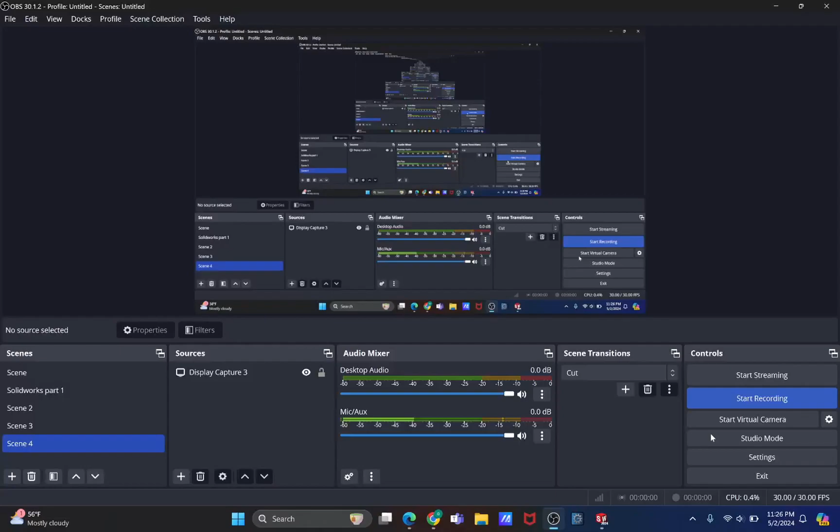Okay, so is this the time of day in which we will finally get to our final test essentially.

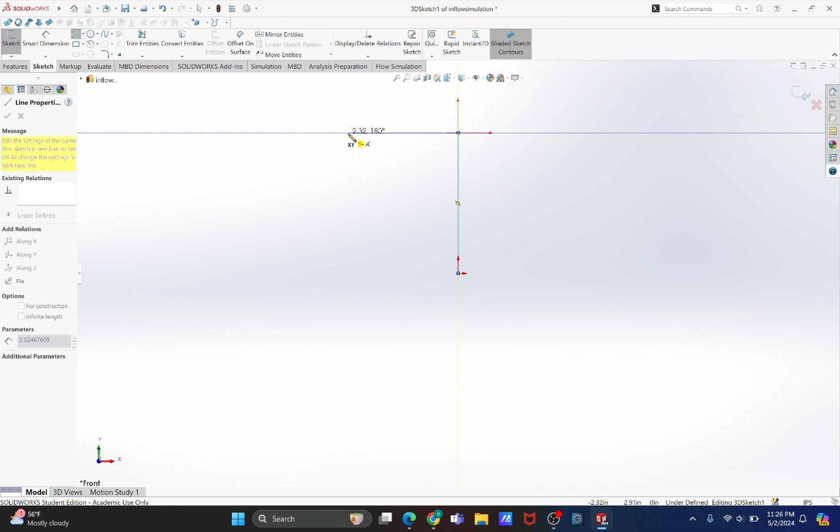So what we want to do is just create a sketch - actually, a 3D sketch. As always, I'll select the line, Control 1 on my keyboard so that I'm facing this plane. I'm gonna put this one here and then over here as well. I'm trying to make this as simple and easy as possible. Notice I'm using these red arrows to make my lines.

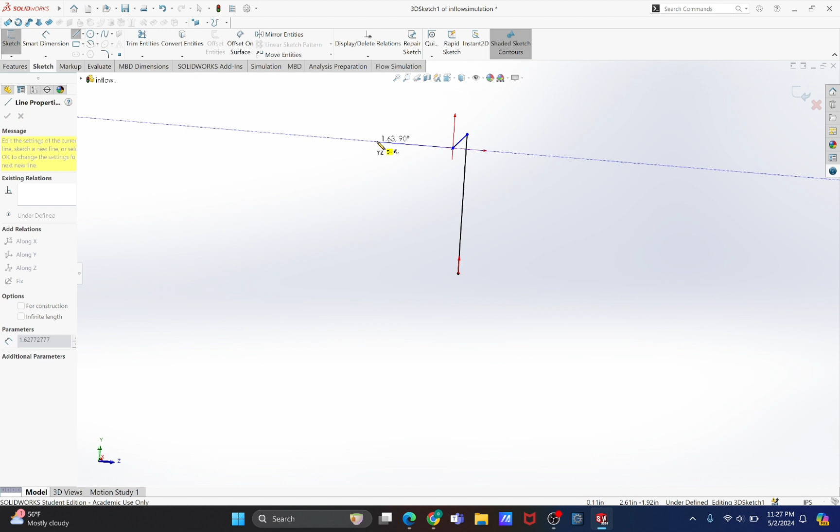I'll go back and select the line, and I want this to go in this direction. Now I want dimensions for this to be 10, and this one 7 by 7. So 7, and this by 7, and then I'm gonna select this fillet, which is going to give me 4.

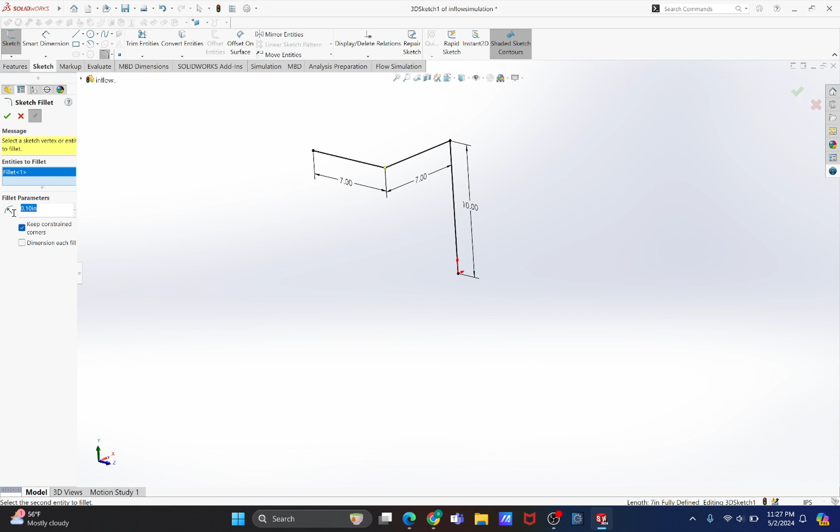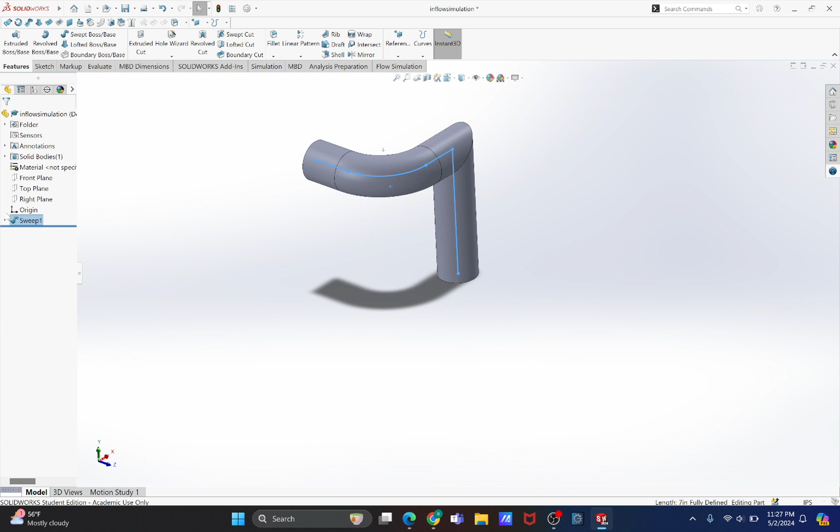After that I want to do sweep boss base, circular, and I want this to be 3. And actually I forgot something else which I will go back and fix.

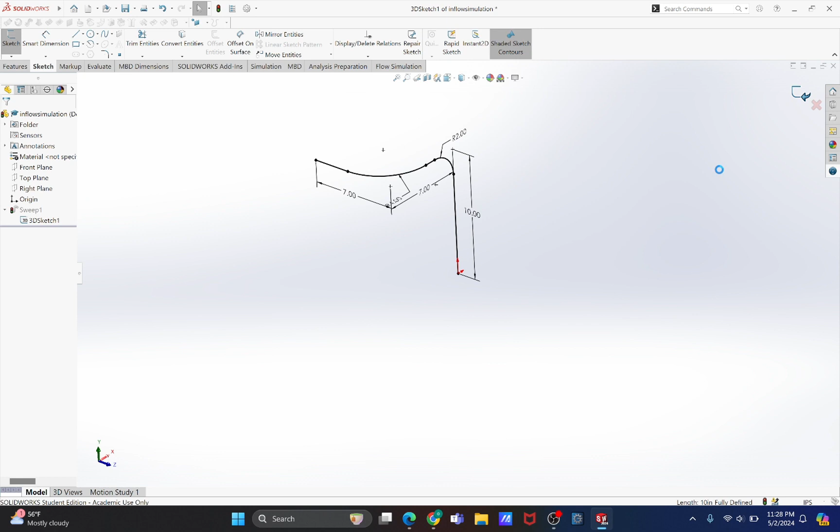I want another fillet right here, but this time it's not gonna work at 4, so I need to decrease it to 2. Okay, that should work, and it does. So then the check mark - there you go. Now I can easily do a mirror image, but I'm just gonna do a sketch.

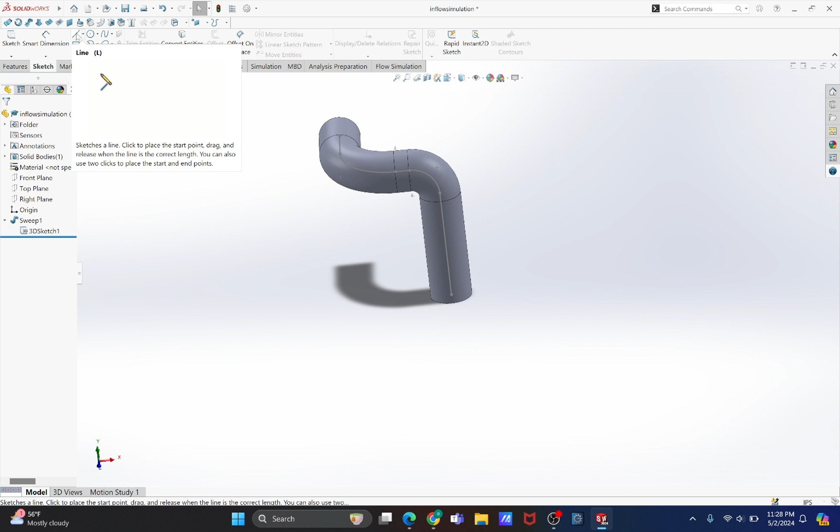So 3D sketch. Before I do that, I want to make sure that I have this as visible. I'm just gonna go right click, show. Now I can go based off of this. And so then the 3D sketch.

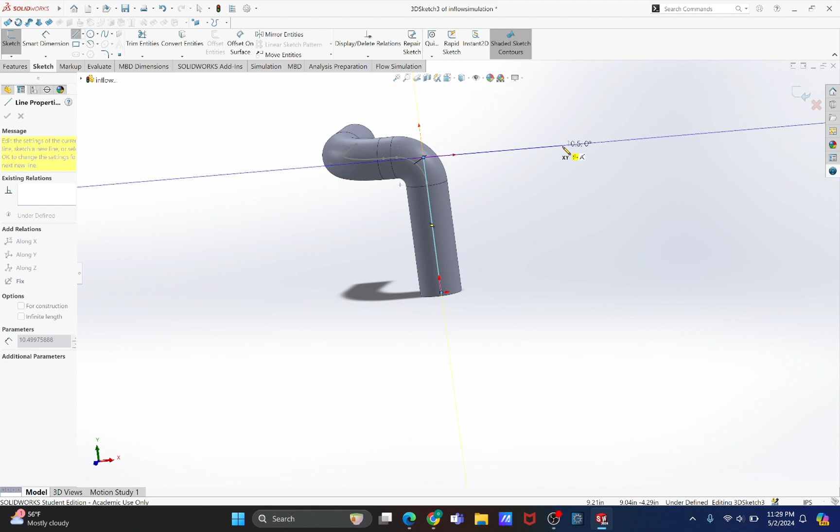We can essentially put another one. Let's see what we get. So let's just do here. We don't have to, but just practice a bit more there. Again, I'm using these red arrows to find my direction.

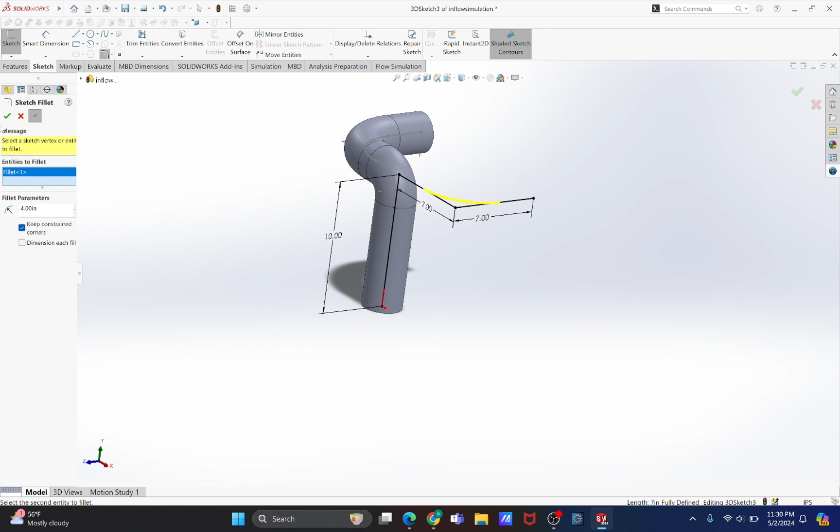Dimensions 7 by 7. That's going to be 7. There's going to be 7 as well. And this one is going to be 10, just like the other one. Now I will do this fillet right there, and that is going to be 4. And now I will make this a 2 by 2 - I mean, radius 2 right here.

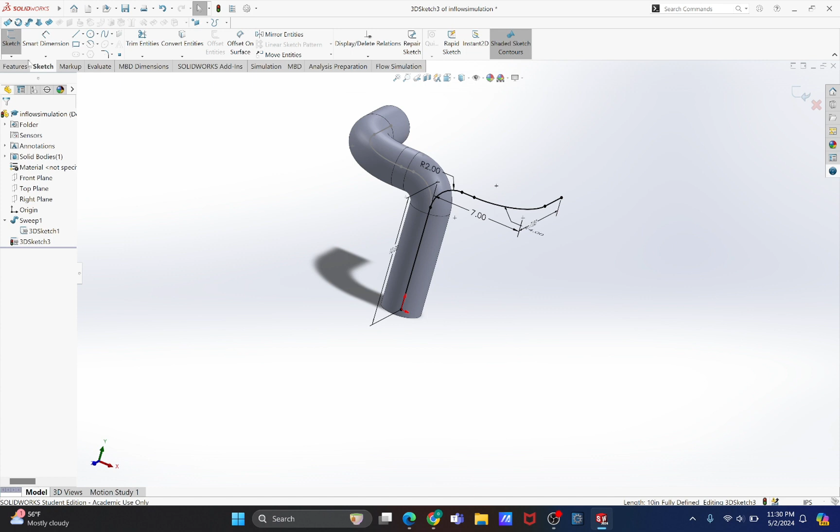Okay. And now we should do sweep boss base. And I want circular. I want this to be 3 inches. And there it is.

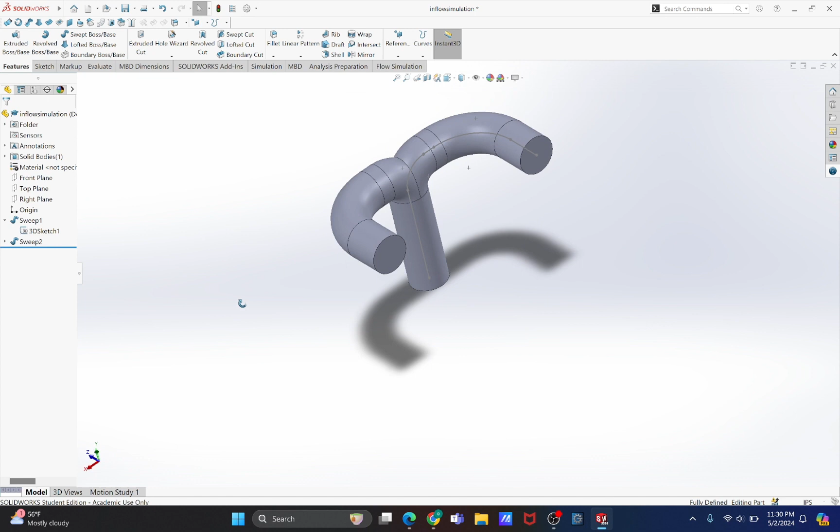Now, another thing that I'm gonna do, I'm gonna put one in the middle. And again, I'll just put a line. I don't have to actually, but I'm just gonna put it just so that I have my reference points. So sketch, 3D sketch. This might be overkill, but that's totally fine.

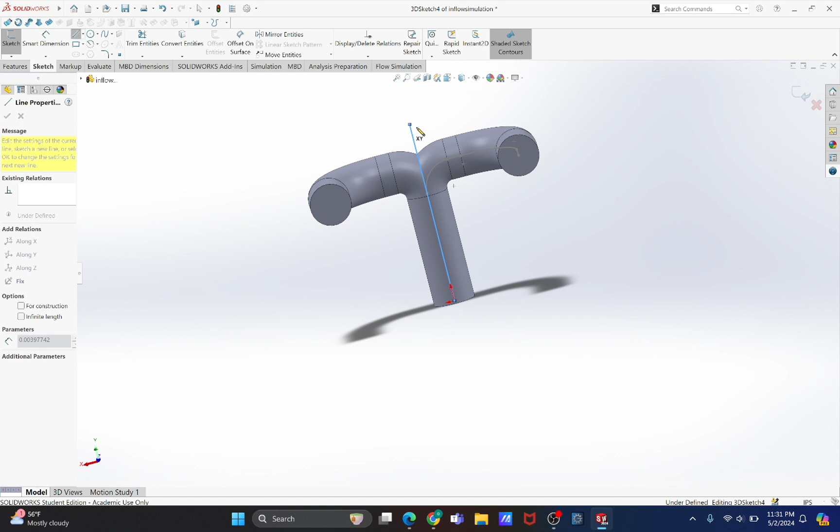Here, I'll just leave it as that because I know it's 10. The height is 10. And so then I'm gonna put it - let me undo this. And I put it as - there you go. See how this line extends?

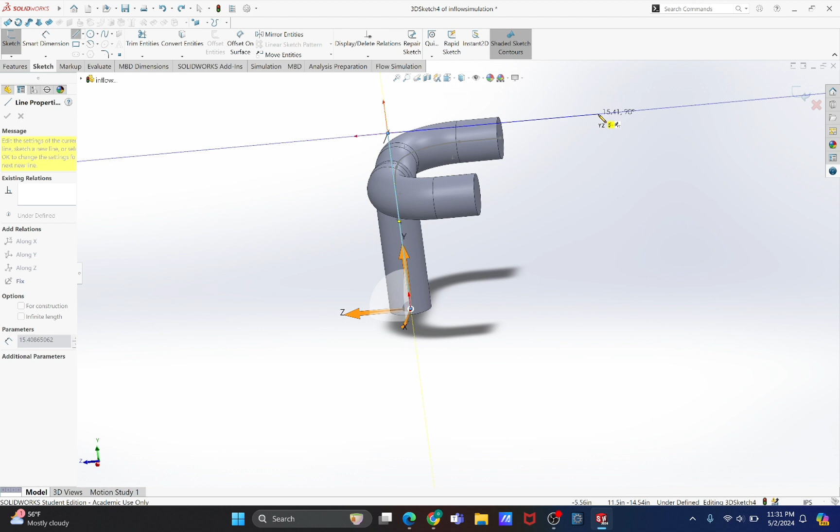That's what I want. And so then, again, this is going to be 10 - I mean 7. I want that to be 7. And I want this to be 10. Alright, and I want to do a fillet in there. So select this one, select that one, and we'll leave it at a radius of 2.

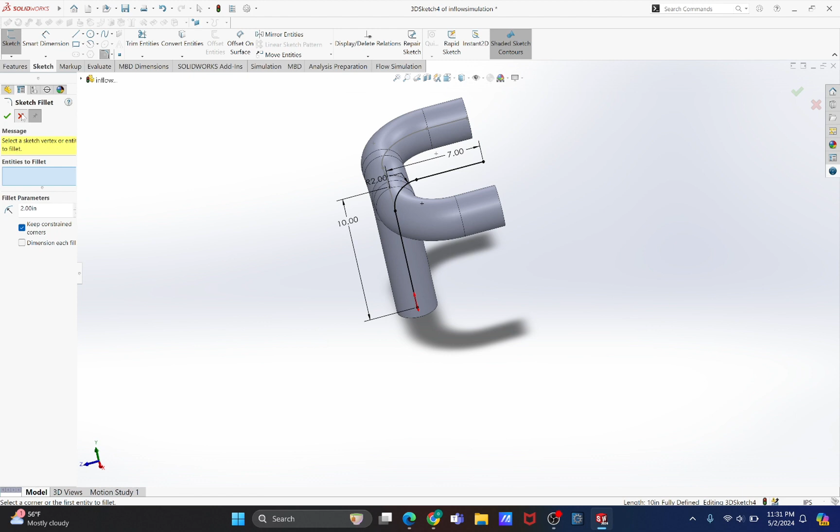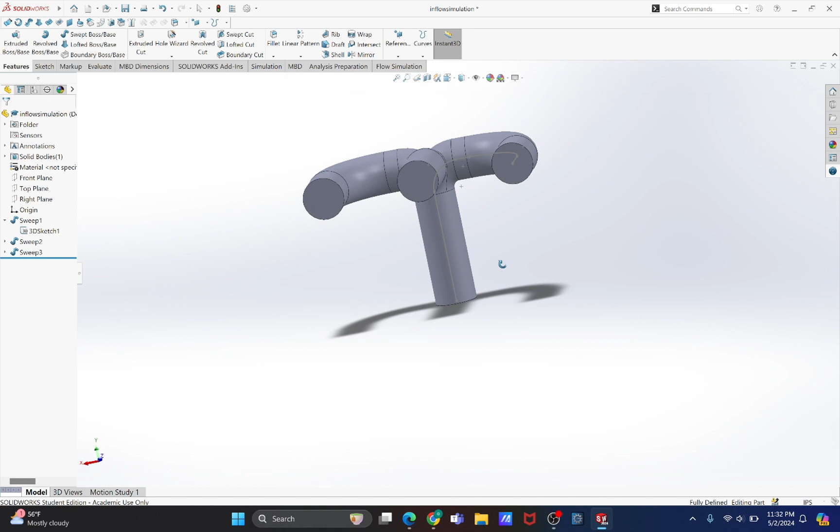And we'll do the same thing we did on the other one, which was sweep boss base, circular, and a radius or diameter that is 3. Okay, so we have this here. Notice that I didn't do any thin feature in this case.

Because I want to make sure that everything is a whole or everything that is connected at the end of the day. And let me just hide this - so right click, hide.

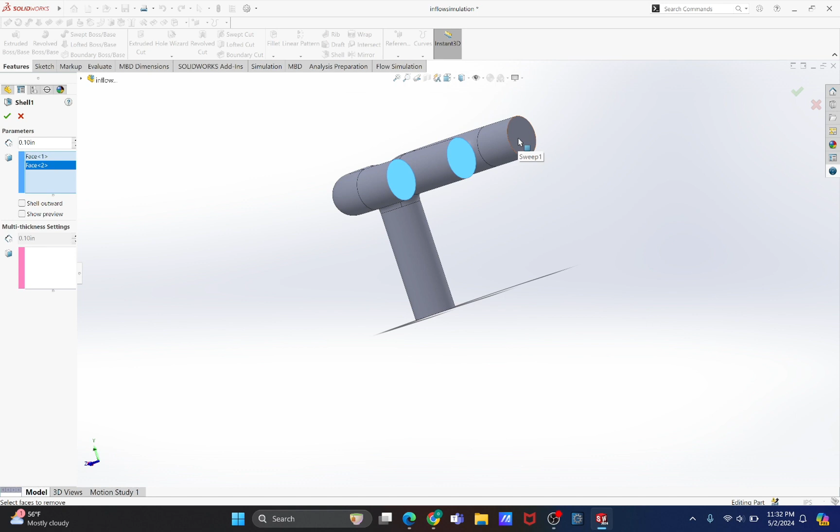Now what I'm gonna do, I'm gonna select shell, select this face, this one, that one, and then the one at the bottom. I want this to be, let's try 3. Let me see how that would look like. Oh no, I have 3. So actually, let me change it to perhaps 2.

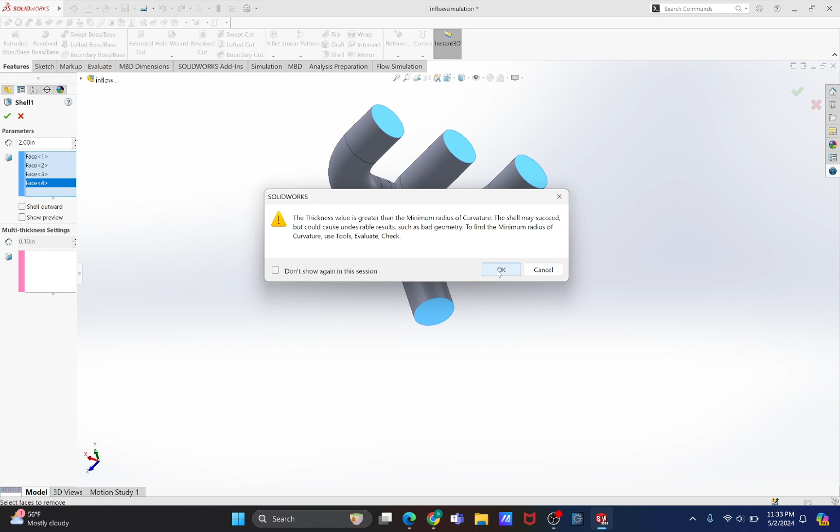Okay, let's change it to 1 then. Would that work? No, doesn't want to work. Okay, let me try that again.

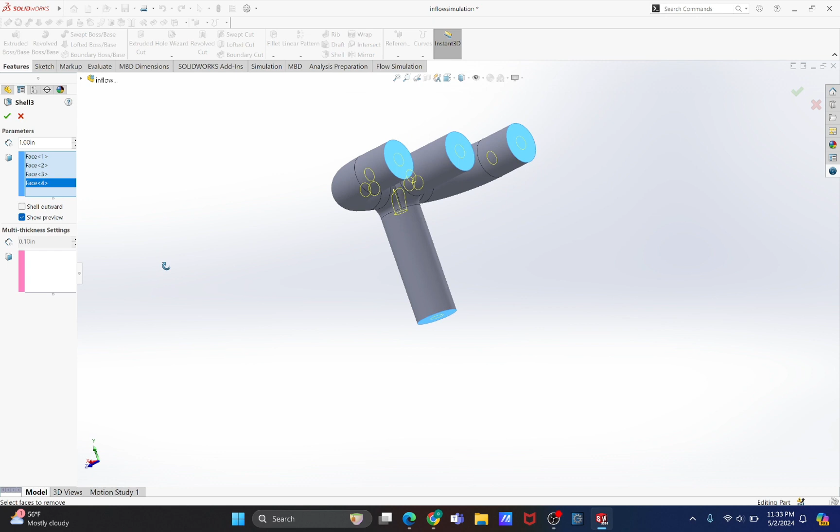So shell, this here, here, here, here. Okay. Point five.

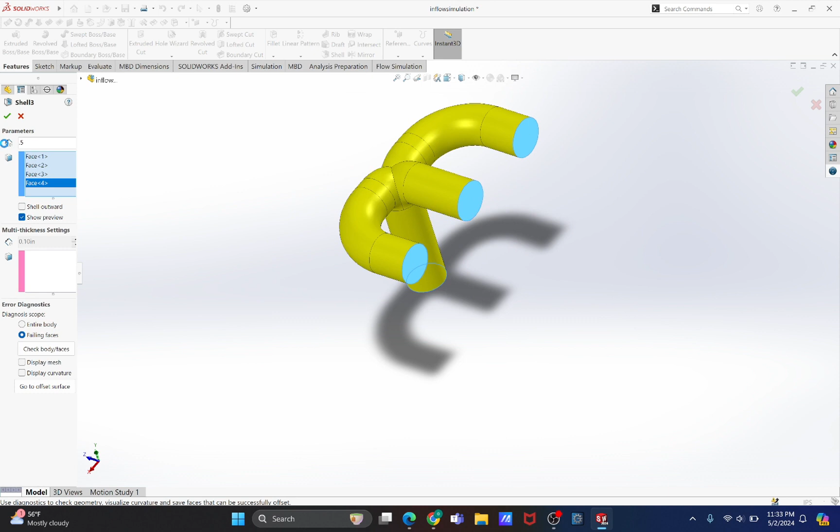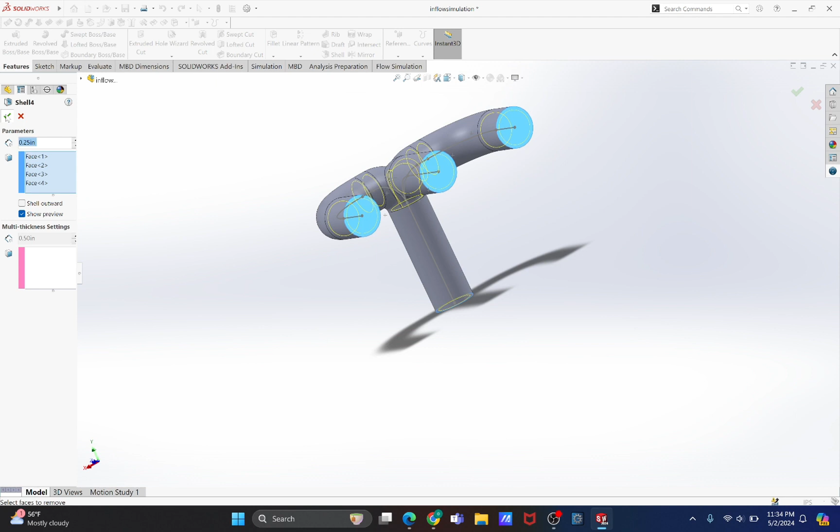Let me try one more time. Maybe let me just double check that. Okay, so we'll do that. We'll leave it as 0.25.

So now we are essentially ready. Make sure you save it in case it crashes. Every step that you do, just make sure you're saving it. So now we are ready.

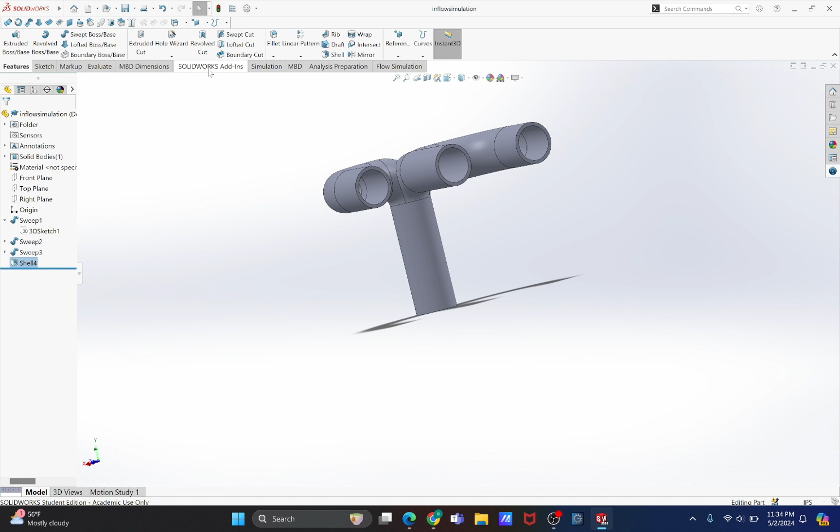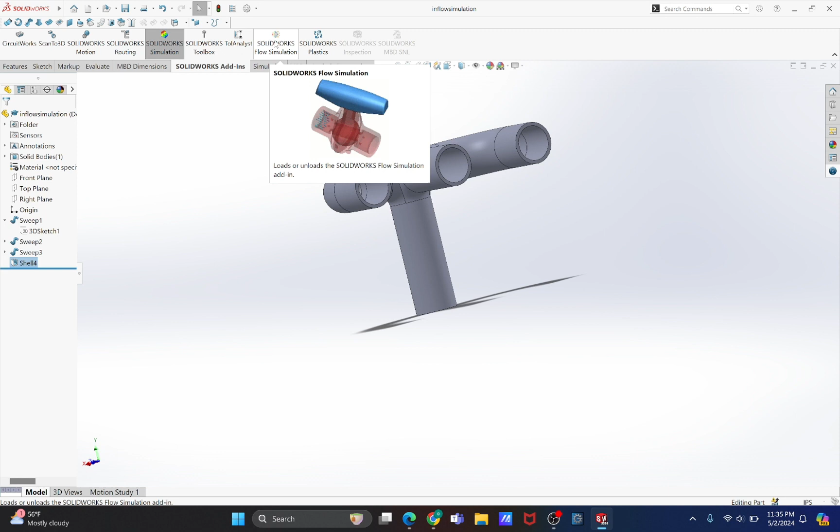If you don't have flow simulation, just go to SolidWorks add-ins and make sure this one is selected. If you click twice, you're gonna turn it off. See how I have it right there? If I click right there, it goes away. You click once, only once, it'll take a couple seconds and then it's gonna show up right there.

So now we just gotta wait until this comes up. And there you go, it's processing. And it should come up right now. Just give it time. Don't do anything else, don't make it crash. Okay.

Although it does look like it's going to crash. Hopefully it doesn't. If it does... oh, there it is. Okay, so again, just let it do its thing.

Now I'm gonna go to flow simulation. Oh, before I do that, I'm gonna add some covers right here, or lids, that is. So go to tools, create lids.

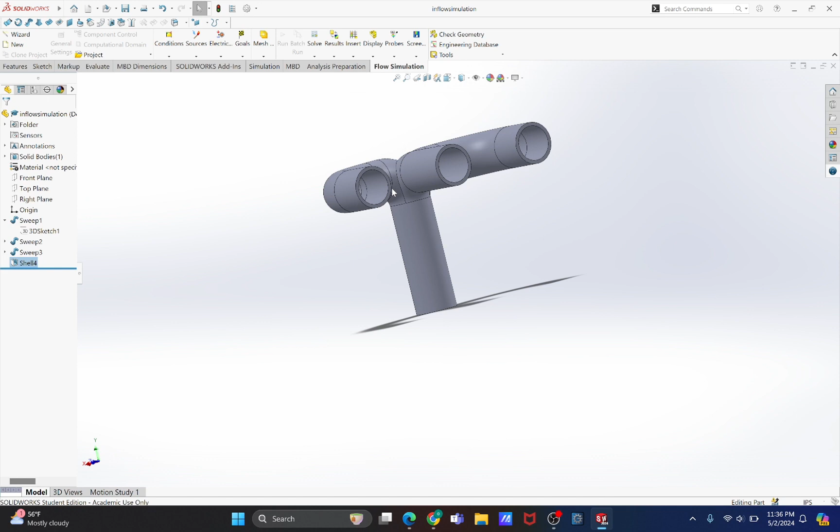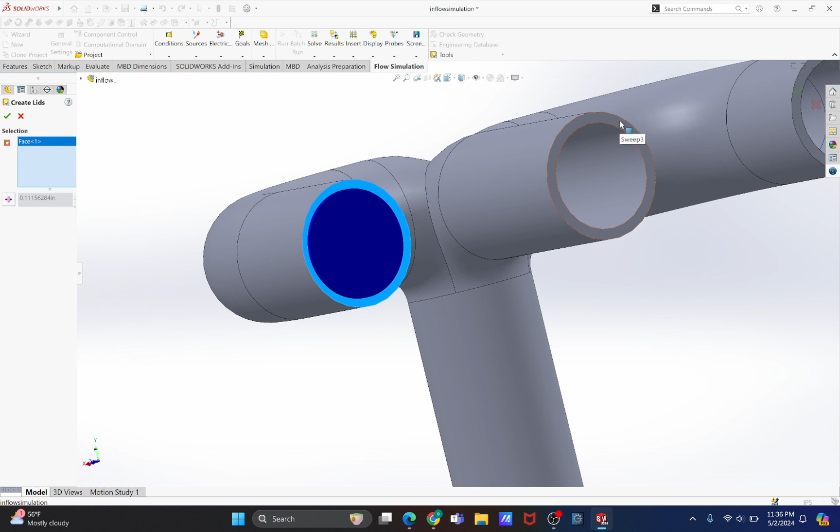Okay, and then just let it do its thing. Okay, there we go. So now I'm gonna select the face, and then you're gonna get something blue in there. So select this face right there, and obviously you wanna do the bottom one. There you go.

And what I usually like to do is I like to go and change these ones. So don't double click on it, just click once and then click again. And then you can just change it to lid 1. Enter. Click once, gets highlighted.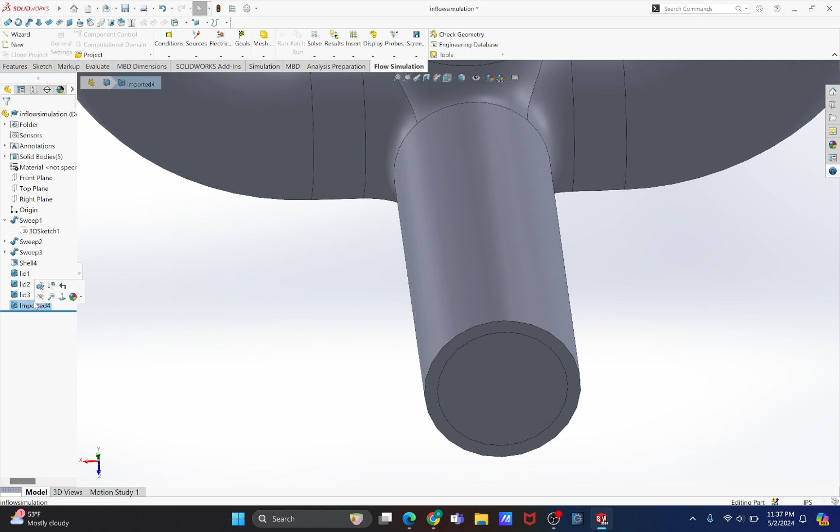Click again, lid 2. And then do the same thing for the other ones. Click, click again, lid 3. Click, click again. So now we have 4 of them.

This is important just because when we try to set our boundaries and whatnot, it's easier to just select the lids, because sometimes we get a whole bunch of options that we wouldn't even know what to choose from.

So now we can just go to wizard, go name it Inflow, and then just put your name in there. Okay, after Inflow, sim for simulation. We're not gonna change anything.

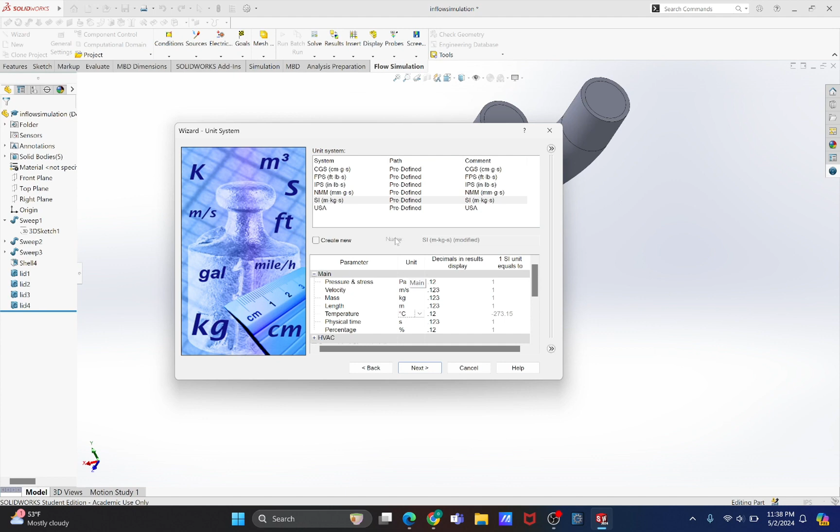Next, I do want to change the temperature. In this case I want to use Celsius. So when you select right there, drop down menu, Celsius. Yeah, I want to leave it as that. Next.

I want to change this to internal, from external to internal. So select right there.

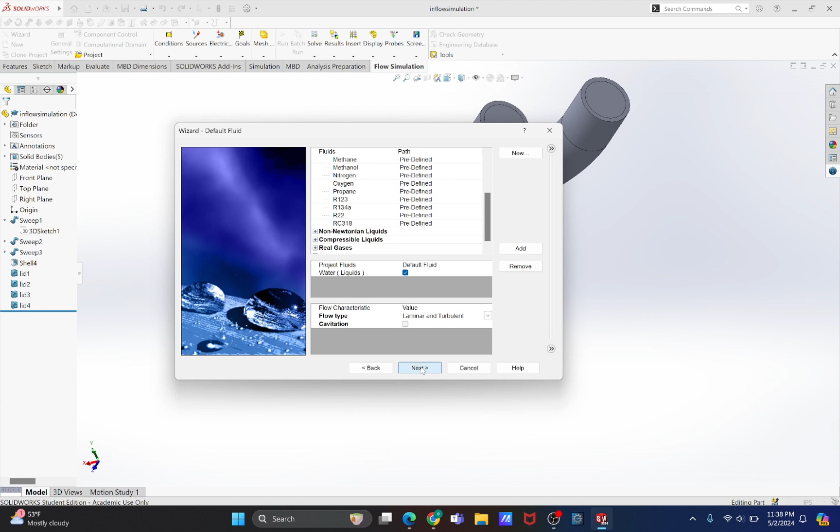Next, I'm going to go to liquids, and I'm gonna scroll down and I want to select water. So select that one, Add is gonna come up right there. Next, and then I'm not gonna do anything in this case for this window. Next, and just finish. Okay.

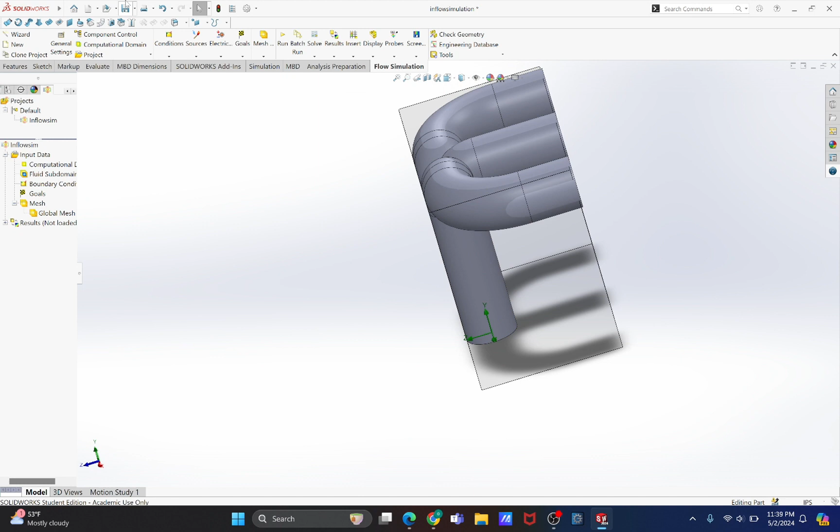So now we just wait a little bit. There we go, that's what we want. Okay, you want to have this little box right there. We can do mesh and all of that, but I'm not gonna do that. Save it. So now we want to create boundaries.